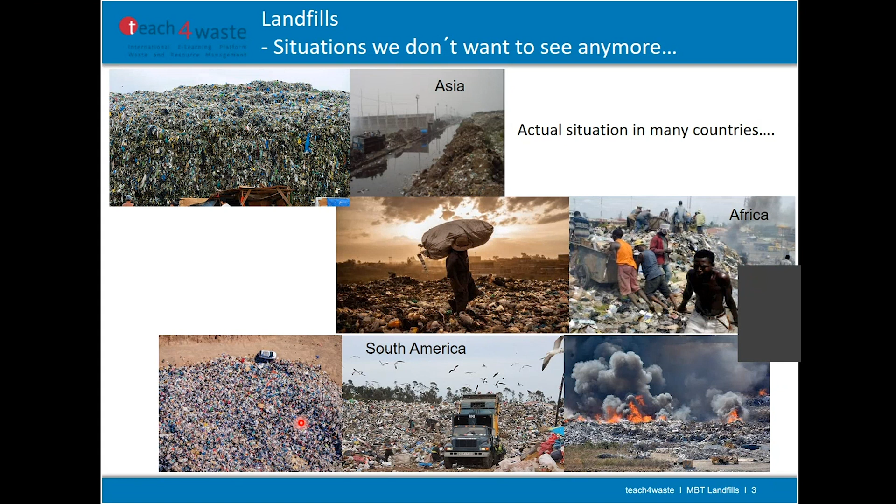So a lot of impacts are associated with waste. We have environmental impacts, we have health impacts. If you look first at the environmental impacts: air, gas emissions, the big problem of greenhouse gases. I think you have heard it also in other lectures.

Then also fire, as we have seen, problems with water. I think this is a very big problem in a lot of countries, especially if we have a scarcity of water. So if we don't have enough water, and this water is polluted by landfills, for example.

Especially groundwater supply sometimes is a problem. Then also contamination of soil, land, changes in vegetation, for example, or big areas are now landfills instead of areas where you can build up houses or make agriculture, and also contamination you have.

On the part of health impact, we have chemical entities, which means we have some toxic components in the waste. Then also during the process of disposal and operation, and on the long-term behavior of the waste inside the landfill, new products are sometimes produced and they are emitted into the environment.

Then we have also biological entities. We have sometimes, as we have seen, animals, birds on the landfills, pathogens, a big problem if it's not made in a good way. Then also an aesthetic impact.

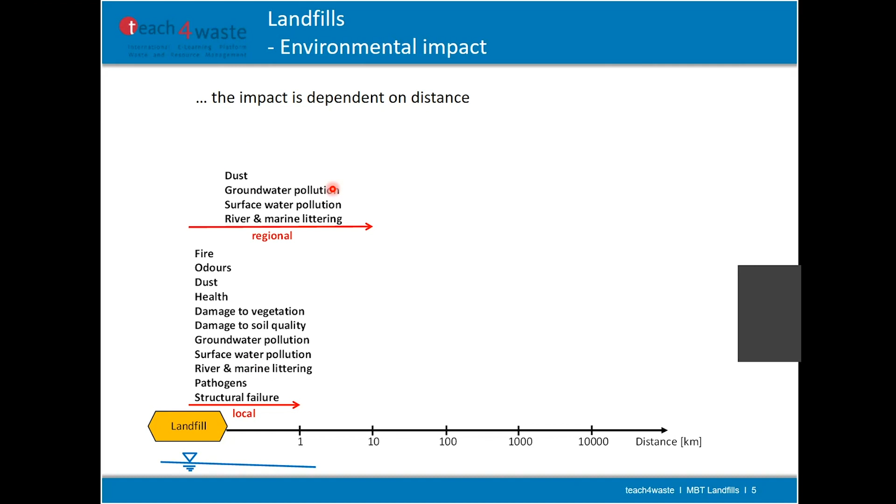On the next scale, on the regional scale, also dust. Here now also groundwater pollution, surface water pollution, and also littering of water. And the last one, the global problem we have, greenhouse gas emissions and marine littering.

So the problems are quite different. People living here nearby the landfill, they are looking more at these local problems. But if you look at the discussion we have about landfills, we are always looking at these global problems. So for the people, the local problems are more important than the global problems.

So let's have a very short look here at greenhouse gas emissions. Everybody is talking about it. I think you know this figure: in Germany, how much of the CO2 emissions are coming from waste management, and here especially from landfilling. If you look at this graph, you can see nearly 78% of the CO2 emissions coming from the waste sector is coming from landfill.

This sounds to be a very big number, but if you look at the amount, these emissions in 2020 have been nearly 9 million tons of carbon dioxide equivalents. So this is the total. But the total emissions, not only from waste, but from traffic, from construction, and so on, in Germany had been nearly 740 million tons of CO2 equivalent.

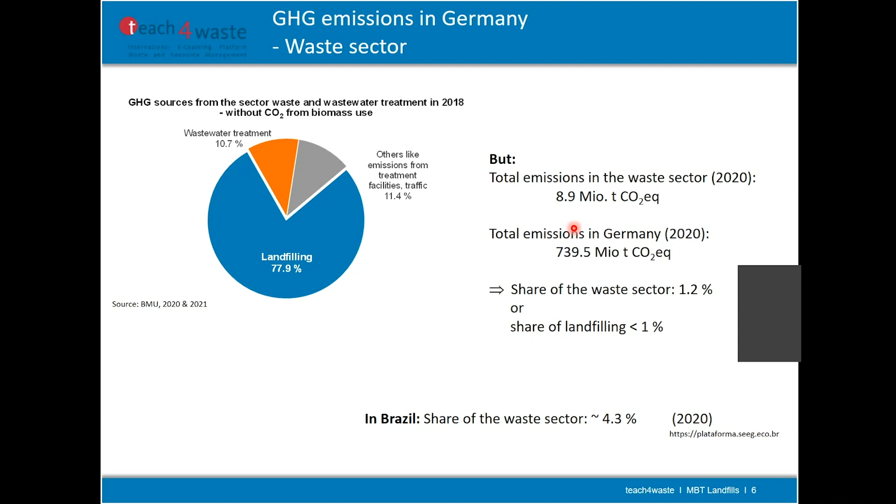What are we talking about? Everybody of us here living on this earth produces about 0.7 kilogram of waste every day, which means 2 billion tons. In Brazil it's a little bit more, about 1 kilogram. And here in Germany it's even more, about 1.7 kilogram.

So it's a lot of waste which is produced every day, and we can expect that because of population growth, worldwide growth, economic growth—so the difference between the very poor, the poor and the rich countries is diminishing—and also because of urbanization, the amount of waste in the next years will increase if we don't stop it. So from 2 billion tons, maybe we will have until 2050 about 3.4 billion tons.

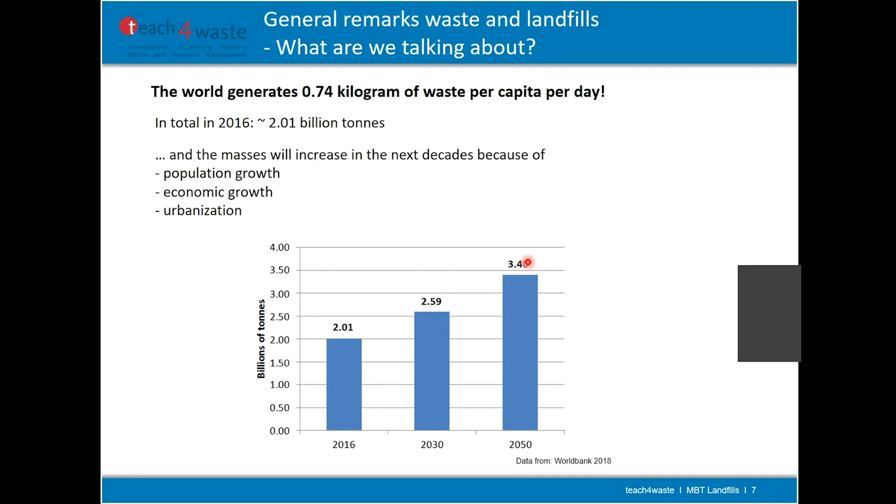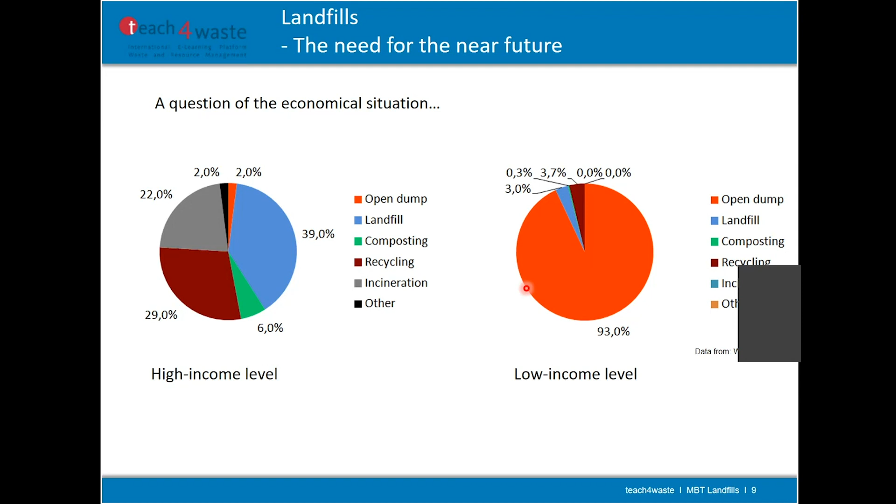So just a short look at the types of landfills for municipal solid waste which is not treated - the standard waste collected in your city and brought to the landfill. This is a sanitary landfill, which is more or less an uncontrolled bioreactor. The waste comes to the landfill and all the chemical and biological processes start, and we cannot control them - they start on their own, and we have to see what happens with leachate and gas.

Here the emplacement should be high, so we can put a lot of waste in this landfill. Then we get, in a short time, highly loaded leachate with high concentrations of different parameters, so we have to purify it before giving it back to a river or to groundwater. With this high amount of organics in the waste, we can also extract gas - we should start very early with gas collection, and this should be used for energy purposes.

We have some problems here - it's called 'dry tomb,' which means that when the operation phase, where we put new waste on the landfill, is finished, we put a cover on it and no more water comes inside. So the waste gets dry and the process stops - this is why we call it a dry tomb. We have problems with this technique, which is standard worldwide.

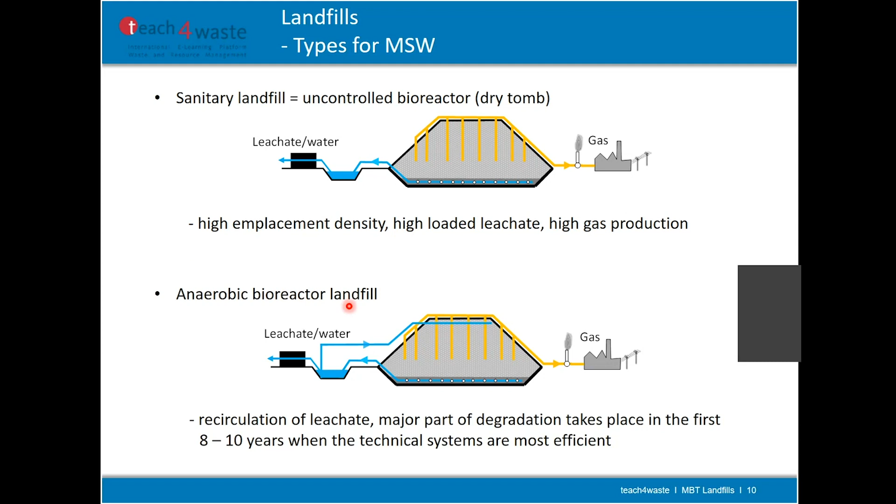So we have some new developments - this anaerobic bioreactor landfill. It was developed in Canada and the US, and the difference is that they do leachate recirculation to intensify gas production. They want to produce as much gas as possible in the first 8 to 10 years, when we know all the systems installed in our landfill are working very well. With this leachate recirculation, the supply of water to the microorganisms inside the waste is much better than in the standard case, so biodegradation may occur much faster.

Another type of landfill is the flushing bioreactor. On one hand, we produce a lot of gas by this recirculation, but in this case we add even more water to flush out components which are not degraded - maybe ammonia, and also the hard COD, the chemical oxygen demand. At a certain concentration, it's very difficult for bacteria to reduce this amount of organic substances, but you can flush out these components if you add water and also other salts.

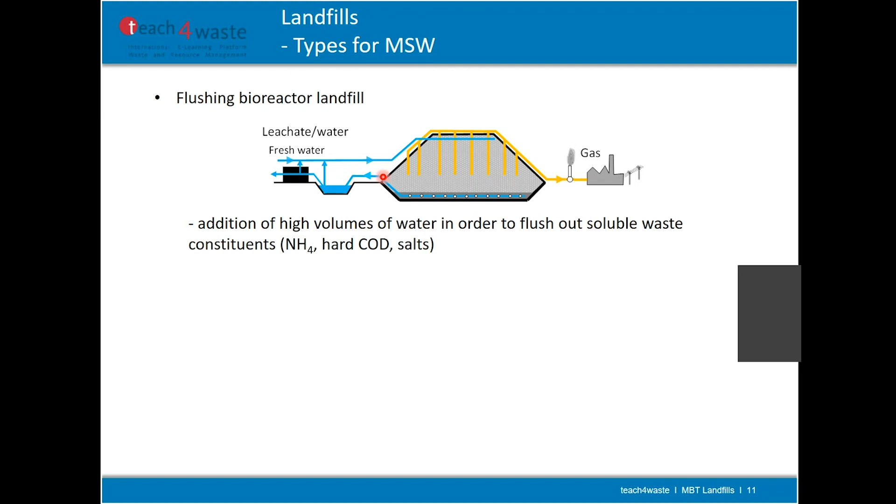Also here we have a little bit of experience - it's not very easy during the operation phase for such a landfill, which is why only a few landfills work with this technique. And another one is this semi-aerobic bioreactor landfill, which was developed in Japan more than 20 years ago.

We have also some smaller landfills in Europe, especially in Italy. Here, in the beginning, when they start to put the waste in this area, they have anaerobic conditions, the same as we have in the other landfills.

After 10 years, maybe 6 to 10 years, they stop with this extraction of gas, and they blow air inside from the bottom. So it's changing from anaerobic to aerobic conditions. In the anaerobic conditions, they get the gas and can use it. When they switch to aerobic conditions, it will stop. The advantage is that aerobic decomposition occurs much faster.

By injecting air at the base, we get aerobic conditions. The temperature inside the landfill will increase, and the remaining gas, the remaining methane but also carbon dioxide, comes to the surface where we can collect it. Also, if we inject air inside, we get out a lot of water, so this landfill will become dry over time.

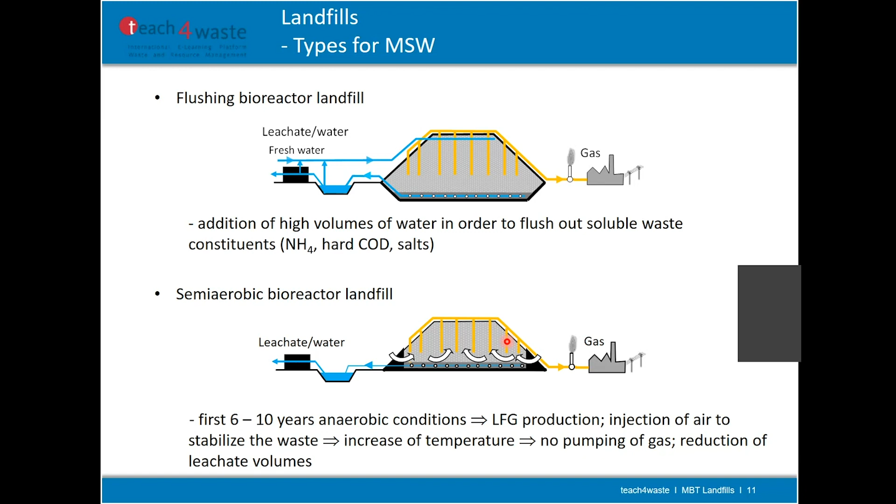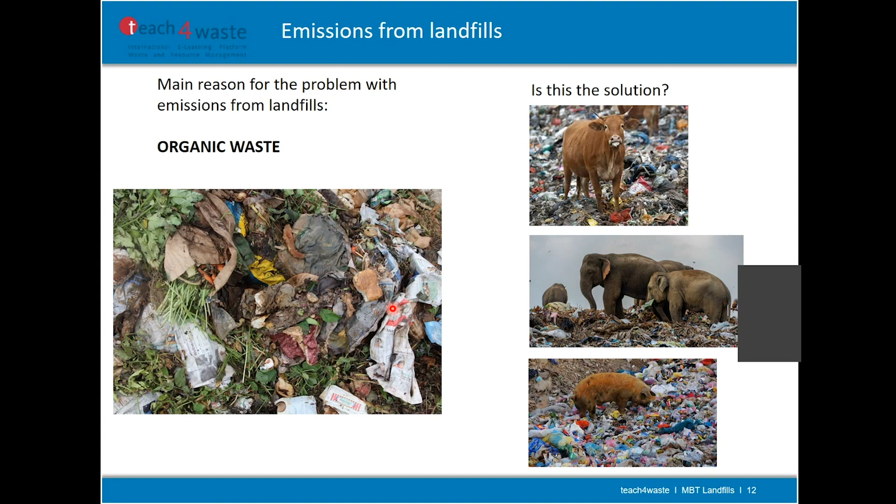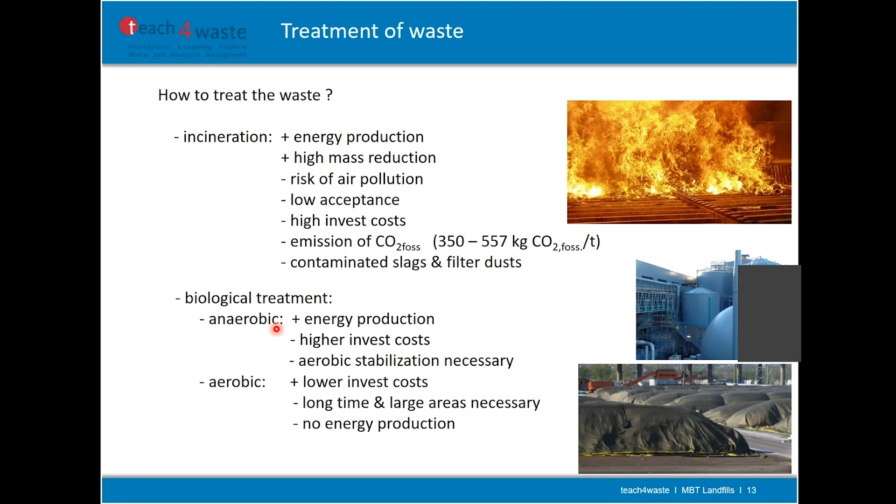But we will have a look here only at MBT. Or at first, let's have a look what is the consequence, what to do with this material. So we need, if you don't want or if you cannot use the slags for construction purposes, we need a landfill for this incineration slags.

Sometimes it's mixed with fresh waste. But if you have big amounts, then it's better to build up a mono landfill only for the slags. And you will see, if you look at the leachate at the base, you will have a lot of chloride inside, which is a problem over a very long time.

And also, you might have here some gas production inside because of chemical processes, not of biological process. And it's not methane, it's hydrogen. So maybe you get also here some problems in view of safety.

This is for the normal slags. You need also here the base liner system. Usually only soil material as a top cover system is enough, and the leachate also has to be purified.

If you have now the fly ashes from the filter, then you need a landfill for hazardous waste. So also after incineration, maybe you are still needing a landfill. And the same for output from MBT. Also here we need a landfill with a baseliner system.

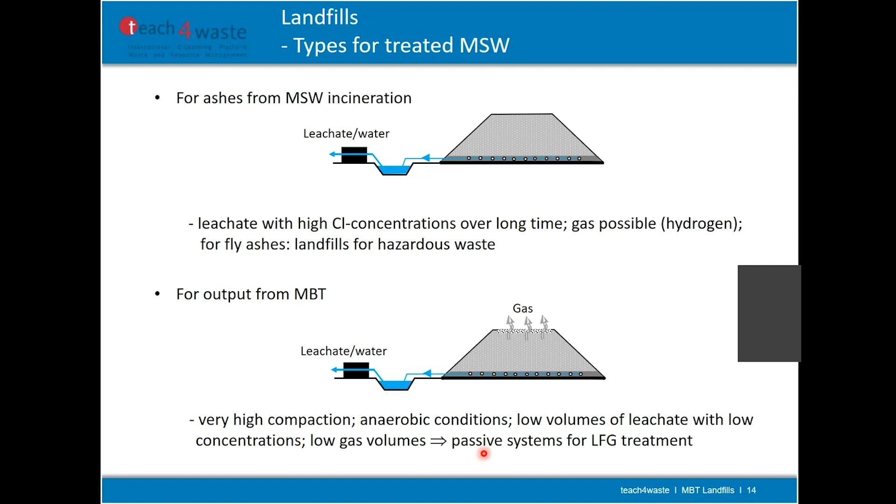Later on, so this as a kind of introduction. Let's go to the landfills. What is the difference between a landfill for fresh waste and a landfill for MBT output material?

So we will have a look at these different points, a short view at the properties, which are very important for the construction and also for the operation, but also in view of the leachate emissions and the very important point of gas emissions.

So this is what we know very well, the situation. Everything which is inside of your waste bin is going directly to the landfill. And if you have a look at the waste, what you can see, which is

Only under the aspect of looking at it, you have a lot of plastic inside. And you see there's a big difference. We have in the size, we have very large parts of waste. We have very much of these fine materials. And very often large parts is plastic, fine material is the organic. So this is what we know for a long time.

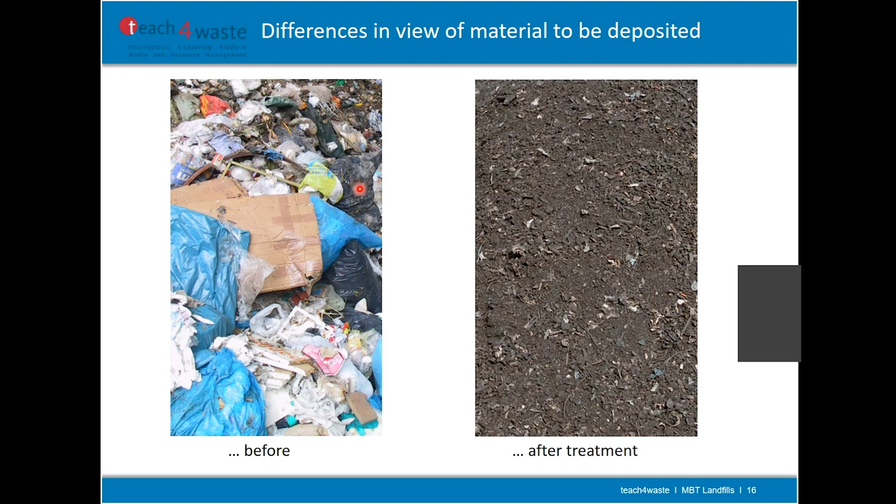And this might be a look of the waste after it has been biologically treated. So a big difference. The color has changed to this typical brown color, which shows you that the organic material is oxidized to a certain amount. And you still have here some plastic parts inside, woods, glass, and so on, but the size is much smaller.

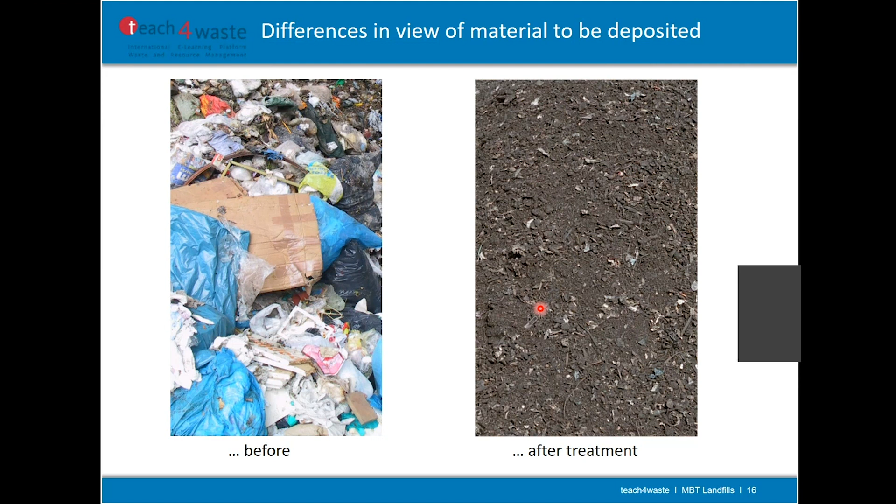In this step of treatment, not all of the organic material is degraded. There is still a certain amount remaining inside of the waste.

Some substances, such as wood, for example, are not degraded under the conditions of MBT.

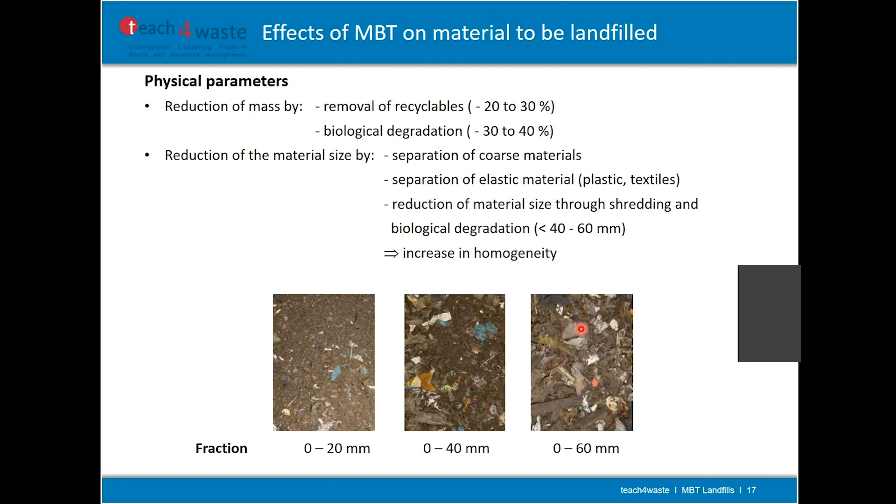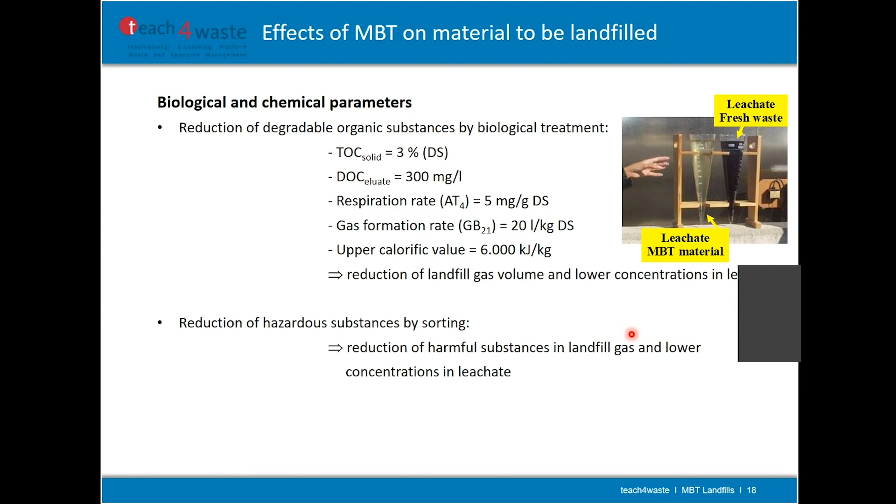And at last, we take out more or less most of the harmful substances if we can identify them. Before we put the waste into mechanical treatment, somebody looks at it to see if there are hazardous substances inside and takes them out, so that in the end we have lower concentrations of these substances in leachate or in gas.

So now we have our material and we want to place it on a landfill. If we want to build a new landfill only for this waste, there are a lot of criteria we have for standard landfills, and they are quite similar to what we need for an MBT landfill. There are no big differences. In view of site selection, you should look at the place where you want to build your landfill, not in regions with earthquakes or floodings, for example. There are a lot of criteria you have to look at.

You still need an entrance area, but now it's not the trucks collecting waste that come to your landfill, only trucks coming from the MBT plant. So the control of this waste is quite different, much easier to control. You still need a baseliner system, but you have to think about whether you can use lower requirements for building this system.

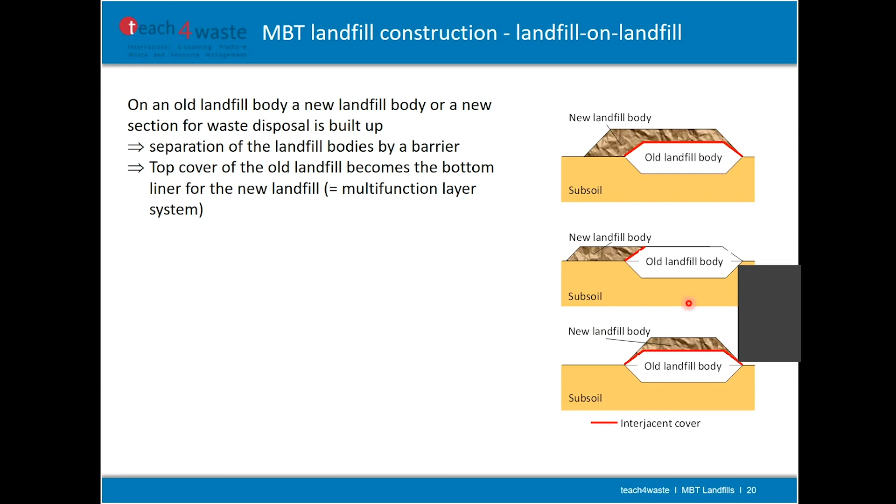It's not a problem to install such a system, but what you have to keep in mind when planning such a cover system is that the base of the new landfill body is not the natural soil - it is the old landfill body. And maybe this landfill body has not been compacted very well, so it's quite soft.

If it is quite soft in this area, you might get settlement. Problems with settlements is that we always have differences - in some parts maybe the settlement is 1 meter, and on the side it's only 50 centimeters. So these differences are always causing problems. So if you have this non-uniform settlement of the old landfill body, it is damaging your cover system. This is a big risk you always have to look at.

So let me say, if you are looking in Brazil and you have an old small dump, then I think this is not a good solution, because you can be sure that this old dump will have high settlements since the compaction has not been good. So there you must be careful - you must have a closer look to make some investigations about this old landfill.

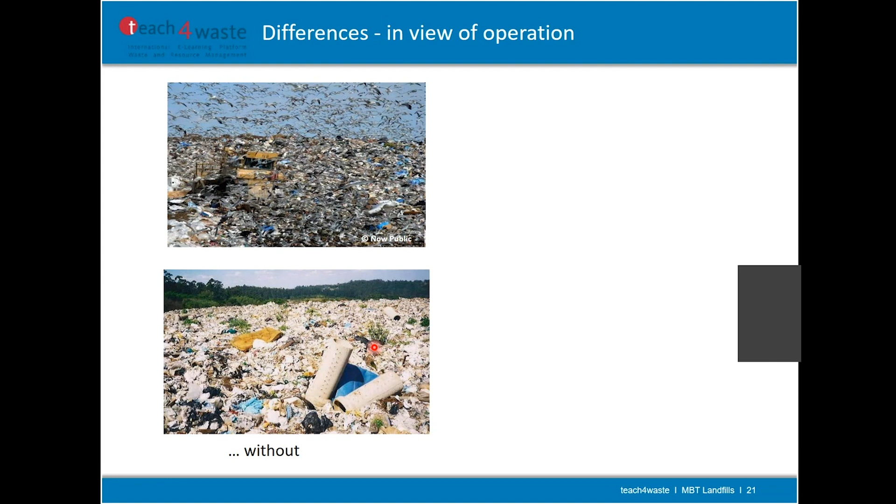So this might be the look after you have made a treatment of the waste. You don't have these birds, the material is looking more homogeneous, you can place it much better, and you get a nice surface.

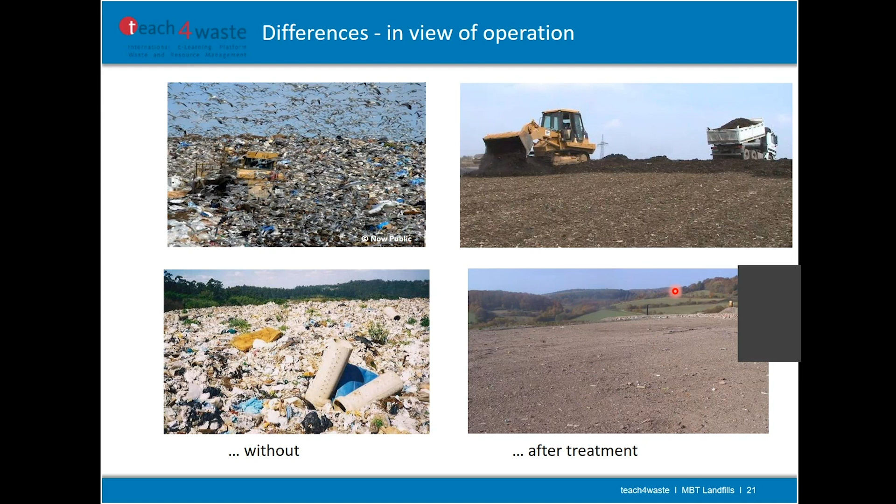So something completely different - and this is what we try to build up when we make a new MBT landfill. So from these pictures, you can also see that now the engines we need for operation might be quite different. So for both landfills, fresh waste and MBT, usually for waste distribution we use track loaders, caterpillars, or whatever.

Also for MBT waste, here you can see the waste is not coming from collection trucks from the city, it's directly from the MBT plant. Here it's an open truck because the MBT plant is nearby the landfill. If there's a longer distance between the MBT plant and the landfill, you can use a closed container system to bring the waste to the landfill.

It's not a problem. Then it's spread here in thin layers, and it's not compacted, only distributed. We know that compaction with such a caterpillar is quite poor, so it's only for distribution.

If you have a standard landfill with fresh waste, for the compaction you should use a compactor. Here you can see such a compactor. In the case of MBT, it doesn't make sense.

What is the function of the compactor? It has a very high load, and with his special wheels he is also crushing the waste. For MBT we don't need that, because the crushing has already been made at the MBT plant. So this function is not necessary.

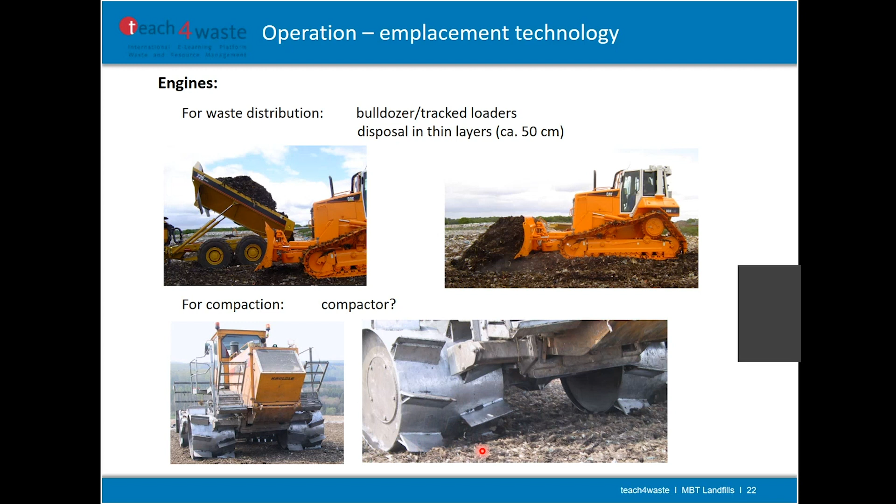What you can see, if you make tests with such an engine on MBT material, this type of wheels is not good for compaction, because when it's driving over the surface it's loosening the material again. So it's better to use another engine, for example a pad foot roller, very similar but with smaller teeth on the surface of the wheel.

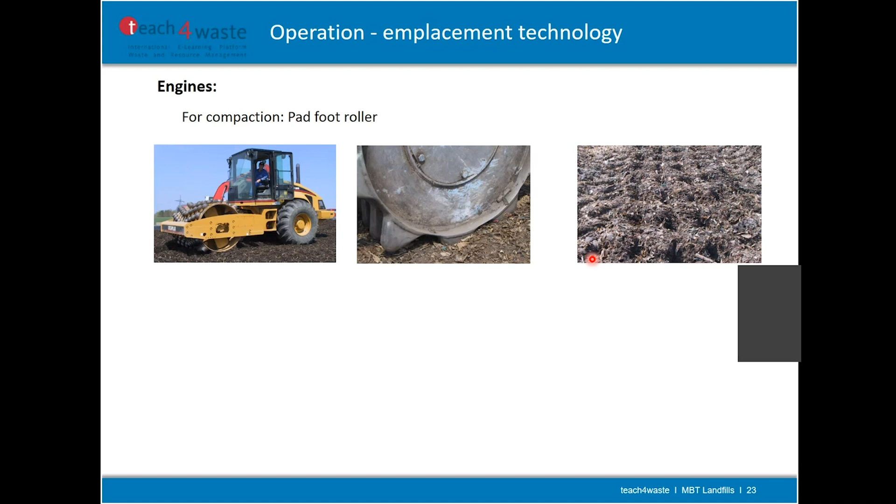What you get when it's driving over it looks very nice, but this is not what we want. You see here a lot of small holes on the surface. It's very well compacted, but when it's raining, all these little holes will be filled with water, and this we don't want.

So we need a second step for compaction, and we take a smooth roller, with vibration or sometimes without, and then we can close all these small holes by driving over it. In total, after 3 to 4 runs, you get a very nice density.

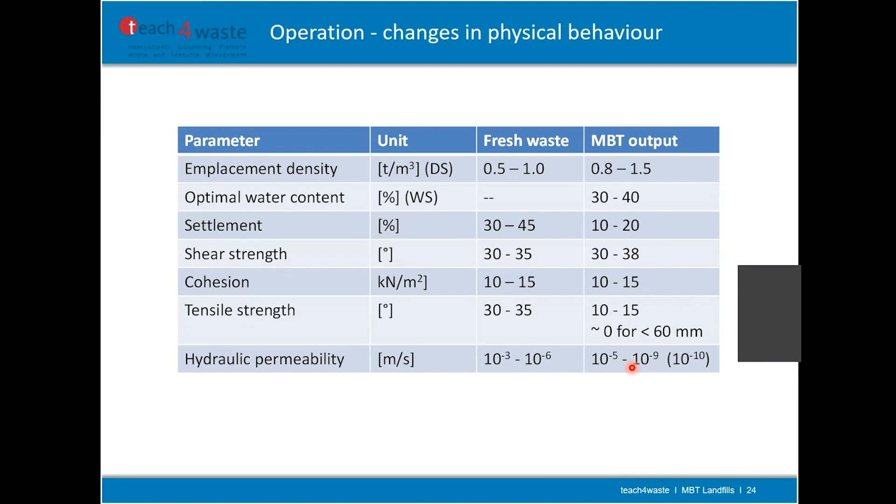The last one, in view of leachate but also in view of the gas movement, is the permeability - here the hydraulic permeability for water. You see it's quite high for fresh waste, and for MBT output it is much lower, which means that less water is flowing through our landfill.

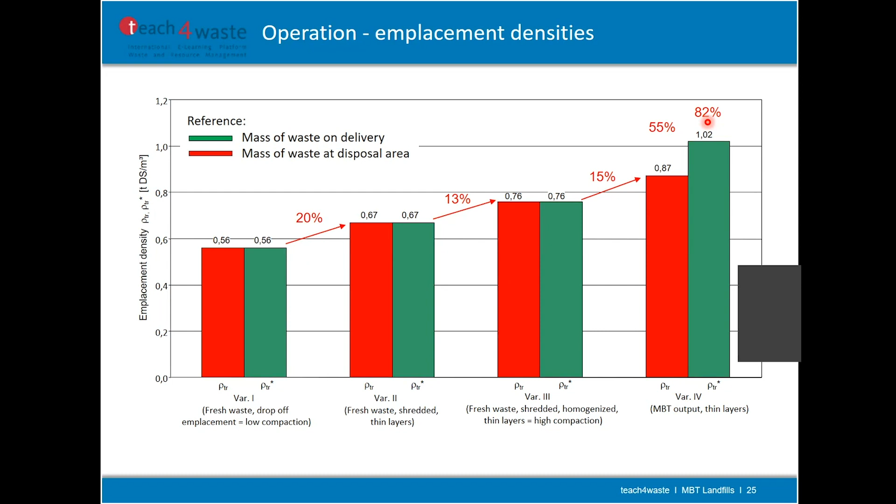The next point, in view of the emplacement density, is settlement. When we put the MBT output on the landfill and compact it, we get very fast settlement. But when it's built up slowly over several years, most of the settlement has already occurred by the time it's finished, so we don't have much settlement in the long term. This so-called secondary settlement is very low, 2.5 to 3%, because we don't have these strong biological processes. In fresh waste, we have a lot of biological processes, and therefore we have also this strong settlement.

Creep means this very slow settlement because of the huge amount of plastic, for example. But we have taken it out, so the problem is not occurring anymore. So, as we have said before, on the long term, we don't expect these large differences.

Now here you can see such a cut in a landfill. It's not looking only nice over the surface, but also here in the cut you see this material. You don't see big areas where you have a lot of pores. If you make the same cut with fresh waste, you will see a lot of holes in this wall.

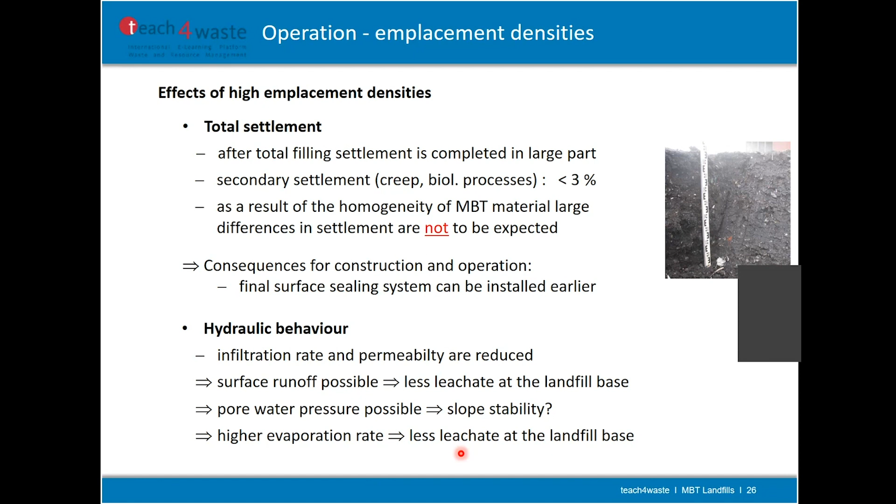This is to be expected because even in MBT, if you look at the micro scale, we have big differences—sometimes a little more plastic or a lot of fine material. This is why we have these differences.

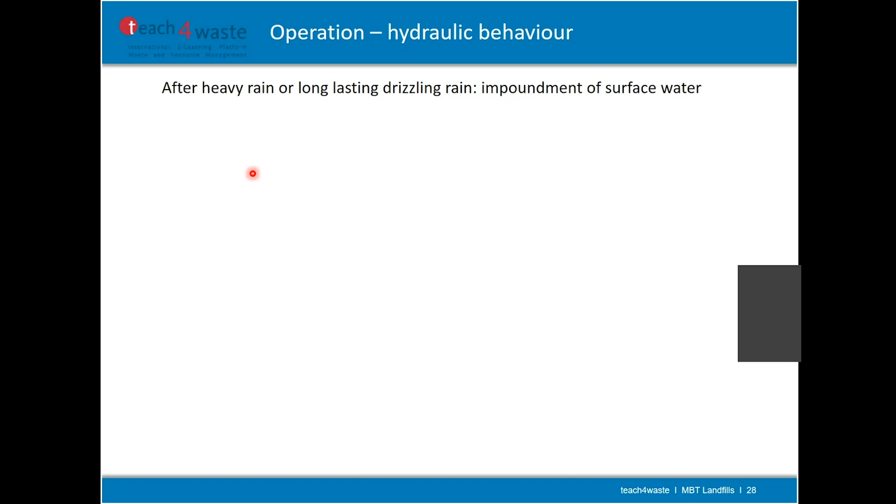So the next point is, with this low permeability, we have to be a little bit careful, especially after a heavy rainfall event, or also a long-lasting drizzling rain event. If it's very wet, then we might get some impoundment of surface water. You can see some examples.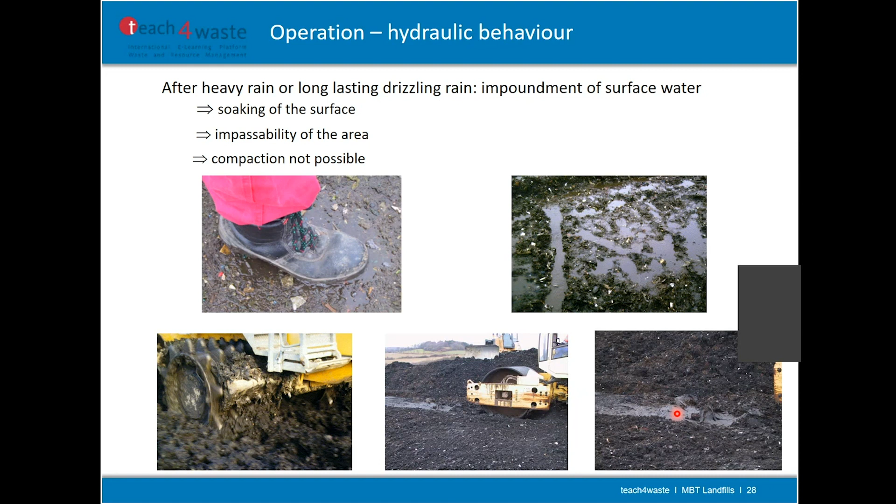So how can we avoid it? Maybe we place here a temporary cover. When we know that it will rain overnight, we place a thin foil on the surface. We put some load on it so wind cannot blow it away. Then after the rainfall event, we can take it easily away again.

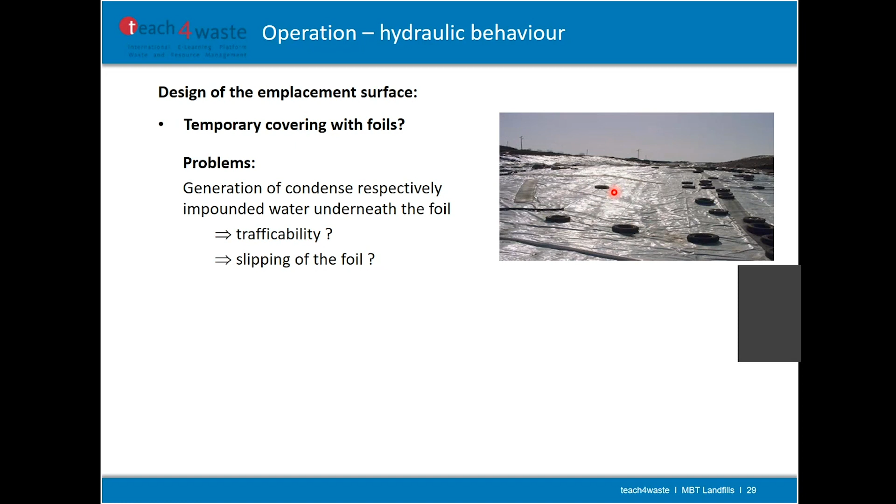But what might happen is the waste below the surface will be wet also because of condensates. The surface will be warmer on top, colder below the foil, and then we get this problem with condensation. Then we get the same problems with trafficability, and maybe then the foil is slipping. So it is a solution, but not a very good one.

It's much better to build up the surface with a certain slope. If you have this nice smooth surface, when it's raining, the water will flow because of gravity down from this area, so we don't have these impoundments. You need a certain slope, 15 to 25% should be enough, it shouldn't be too steep. So most of the water, when it's raining, especially after heavy rain, will occur as surface runoff. And as I said, avoid disposal during heavy rainfall events.

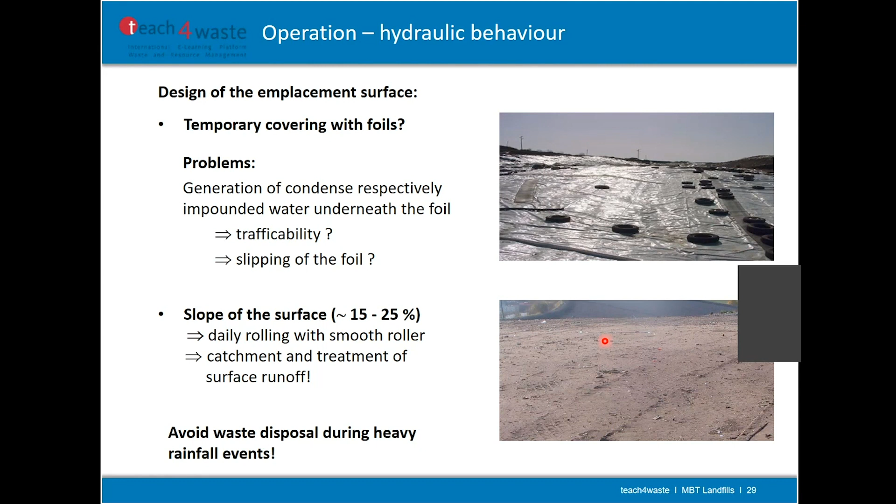So we are looking at the slope. We have seen some parameters which are influencing the stability of our landfill and therefore also the slope. Now if you look at conventional landfills, you can see the slope is very steep, you can build it up almost vertically if you want. It will stay there over a longer time and will not collapse if it is well compacted.

The reasons are the plastics, which are able to take up the tensile forces. They are acting like an anchor, holding back the slope. So the waste wants to go down, but the plastic material, which in most cases is oriented horizontally inside, is able to take up these forces, and this is why the slope will not collapse.

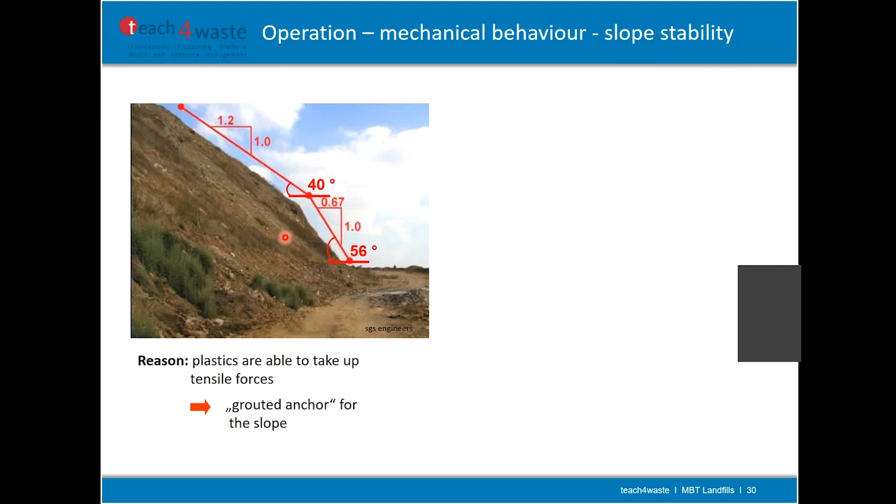In the case of MBT, it's quite different. We are not able to build up such a steep slope. You see here 50, 60 degrees for conventional waste. For MBT waste, it should be below 20 degrees, because we have taken out these fibers, this plastic material - 25 or nearly less than 5% of the mass is still plastic material.

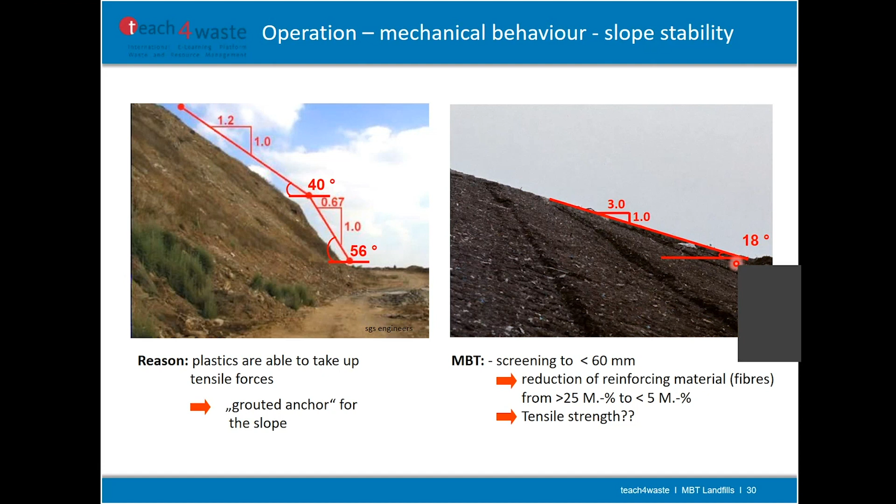So better forget tensile strengths and make a calculation as you do for soil material. This is why here the angle is much smoother. So you have to take this into account, which means also that because the slope is not as strong as with conventional waste, you can place a little bit less waste on this area. Instead of building it up steeply like conventional waste, you have to place it in this smoother way. But you have to take care about it.

So now let's have a look at the emissions. We have just seen the problems we might have when we are looking at the surface when it's raining. So an important parameter is surface runoff. The question is how much of the precipitation occurs as surface runoff and how much infiltrates into the waste.

It depends on the rain intensity. For example, a heavy rainfall event gives a lot of surface runoff. But with drizzling rain, looking at the complete day, it might be the same total amount as the heavy rain, but taking not 1 hour, but maybe 10 hours. Then the same volume of rain may infiltrate into the waste and you don't get any surface runoff.

It's also a question of compaction. Good compaction always means you get some surface runoff. Also the degree of saturation of your waste material matters. If it rained yesterday and it's raining again today, not all the water can infiltrate into the waste, and you might get surface runoff.

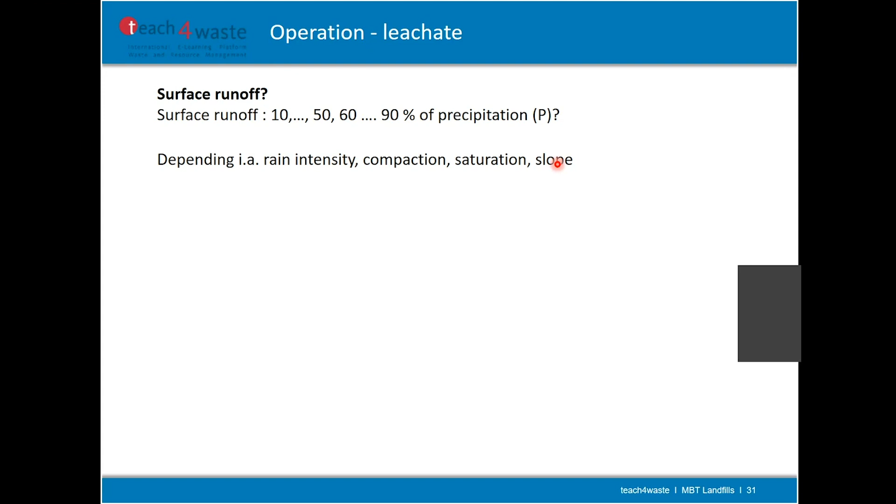And also a question of the slope. The steeper the slope, the more surface runoff you can have. If you look at fresh waste in a standard landfill, usually from such a surface you will not see a lot of surface runoff. You will get some ponding of water, water sitting on the surface, but it will not flow much to the side.

So depending on the waste and how it has been compacted, you might get 15 to 60% of precipitation reaching the base of your landfill. You see this huge range. So quite a lot of water might end up at the base.

This high amount of leachate volume occurs, for example, if you use a caterpillar for compaction, where compaction is much lower than with a compactor—then the leachate volume will be reduced. So from operation you can also influence the amount of leachate, and this leachate has to be treated.

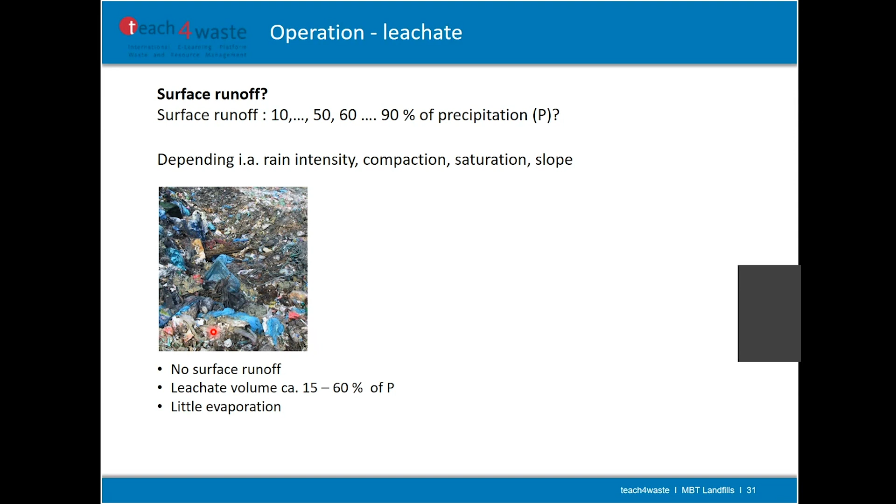Also from this surface, evaporation is quite low. Only the water on the surface of the plastic material will evaporate when the sun shines again, but from the resting material underneath it's quite low too.

So the leachate volume at the base is therefore much smaller than here. When it's very well compacted and you have a steep slope, you can expect only about 5% of the precipitation as leachate. And from this surface, evaporation will be much higher—not just 1 centimeter, but maybe several centimeters—this waste material will dry out when the sun comes out again.

And then when it's raining again, this volume can be refilled with water. It's not going into deeper parts, but stored near the surface.

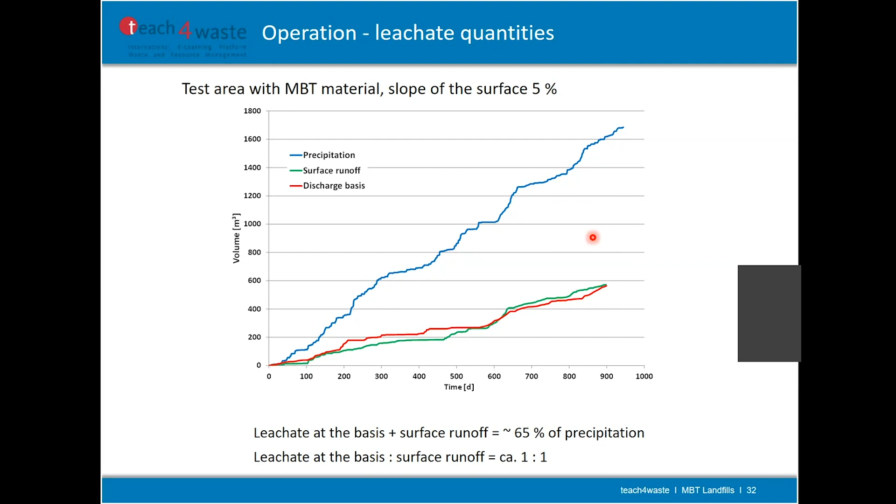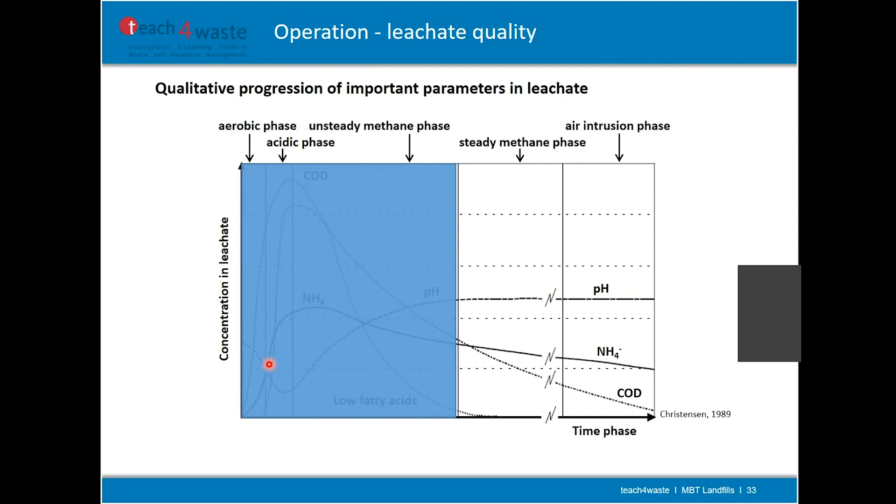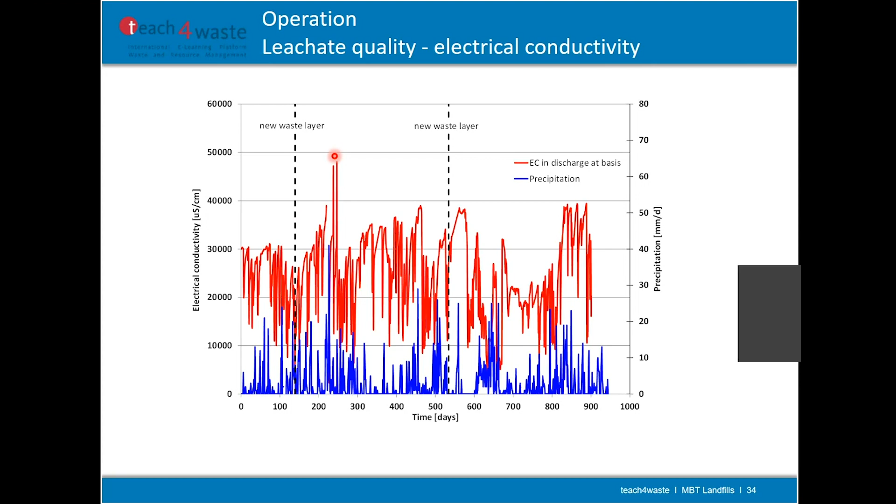So there is not always a relationship between the height of the concentration and the amount of water which is responsible for this leachate. So here we can see it's very similar to a normal landfill. But now let's have a look at COD, the organic compounds in leachate.

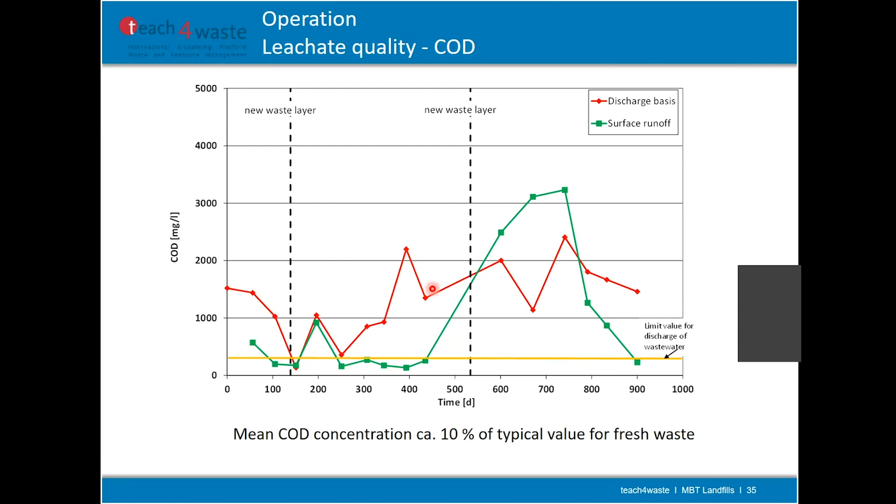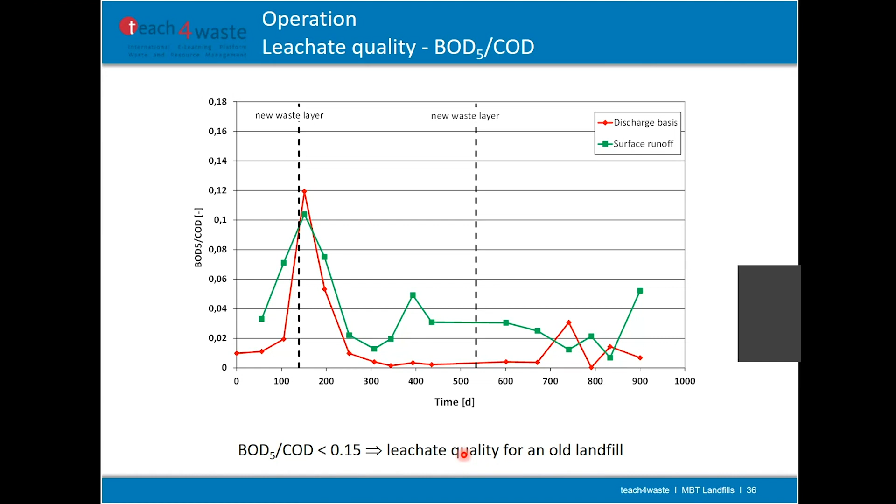This is the so-called hard COD, which takes a very long time to be degraded. If this ratio is below 0.15, this is the same quality you find in a landfill which is 20 to 30 years old. So by this MBT treatment, the degradation is working well, and the load in leachate is quite low.

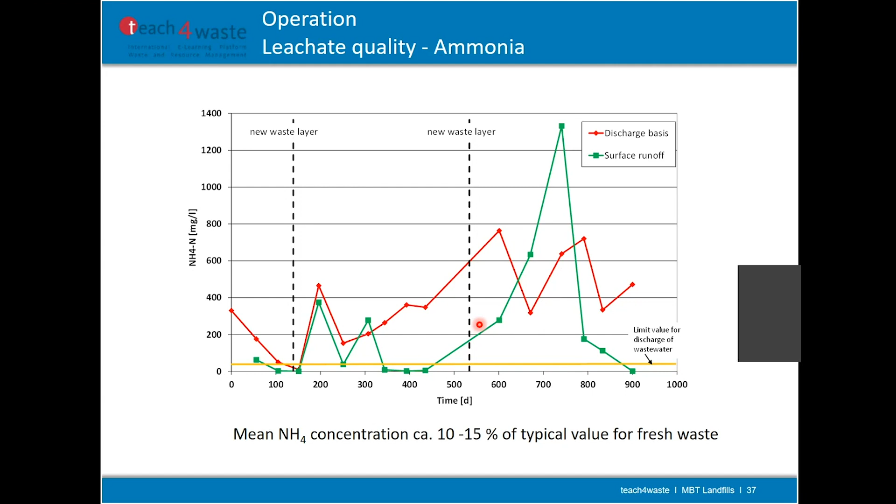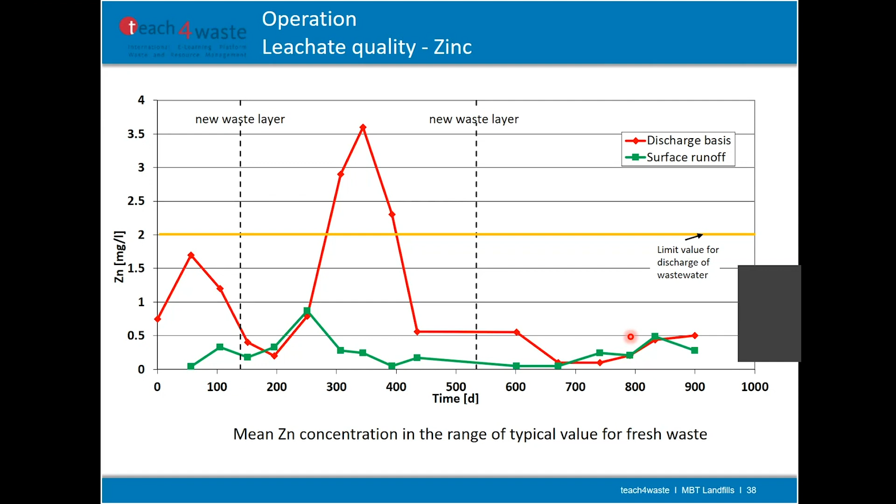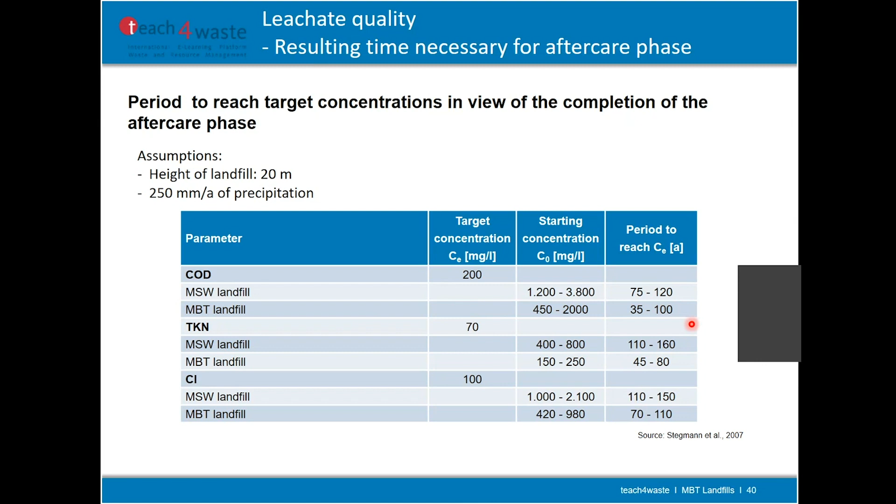Just a short summary of all this data for the leachate. We have to collect surface and runoff and leachate. We have to collect it. We have dilution effects, especially in the case of surface runoff. Treatment, we have to have a look at it, if it is necessary, always also for the surface water.

Then we can also observe that sometimes we have a short time increase after the emplacement of new waste layers. This is an effect which sometimes occurs. And the concentrations are much lower than in fresh waste, typical for landfills in the stable methane phase. The biostability is quite high, which means our MBT has worked very well in view of this organic material.

The same as we have seen for the leachate is also happening when we have MBT before. All these high amounts of gas emissions we can avoid if we do MBT. We start at this moment where we have this final cover, so where we have already only this very small concentration. This is the material which is going to the landfill, so we don't have these big amounts of landfill gas which is going into the atmosphere.

So roundabout a reduction of about 80 to 90%. Only 10% of the total volume of gas which is produced can go into the atmosphere. Depending on the type of waste, we also assume that 10 to 45 cubic meters per ton dry substance we still have as a potential in our MBT material. We can expect that this gas is flowing very slowly through our MBT landfill, because we have seen the low permeability - it's also a low permeability for the gas and not only for the liquid. And also we have very low temperatures in the MBT landfill.

Temperature has an influence because if we have a gradient, when it is warm inside of the landfill and colder outside, then we have a good transport because of this difference in temperature. But in fresh waste we have temperatures of 50, 60 degrees, while in an MBT landfill we maybe have 20, 30 degrees, but not more. So we don't have this driver of transport because of the temperature gradient.

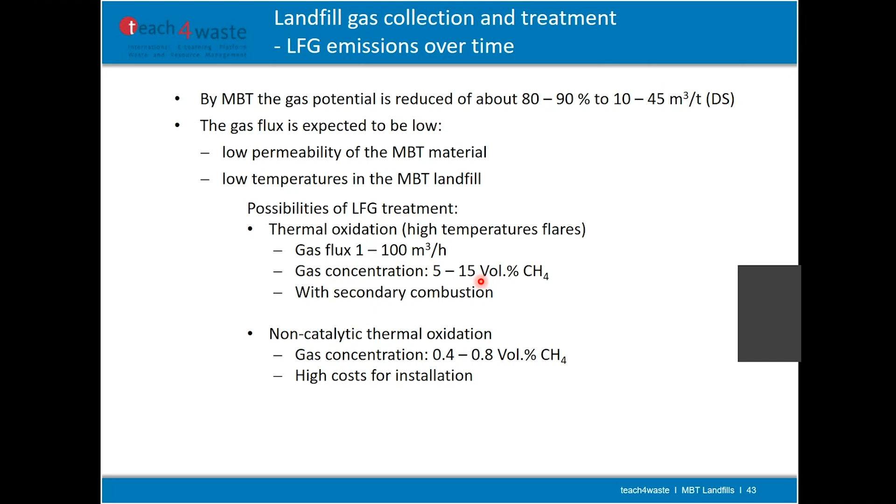So these are the active treatment possibilities we have. There are a lot of developments at the moment in this area to get more techniques, or we use a completely different system. This is a passive system, which means we don't need any gas shafts or horizontal drainage systems. We can use the waste as it is on the landfill - it is a passive system. We don't have to suck out the gas from the waste material, and we do it with a so-called methane oxidation layer. So this is what we'll have a closer look at in the next minutes.

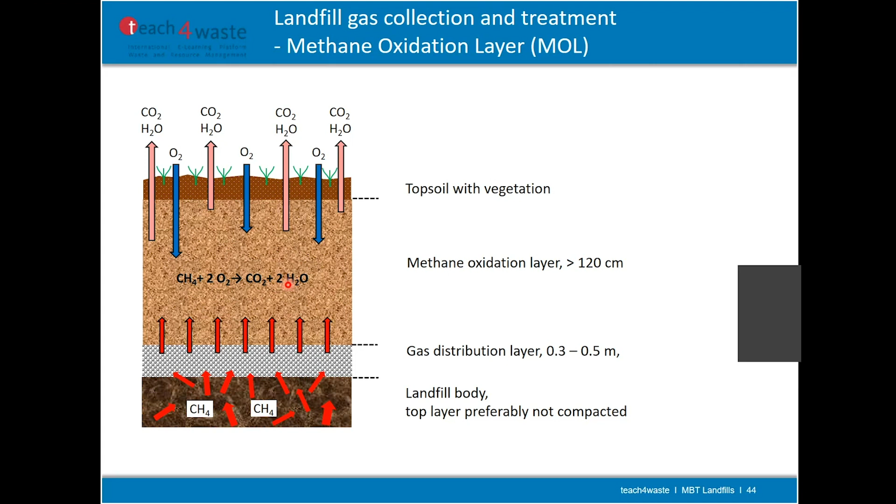So here we have some bacteria inside. They need methane, they need oxygen, and then they can reduce it to CO2 and water and energy. So you need both. Only in this area are there also these methanotrophic bacteria - they only can live in this area. And this is then the reaction which is occurring in these small bacteria.

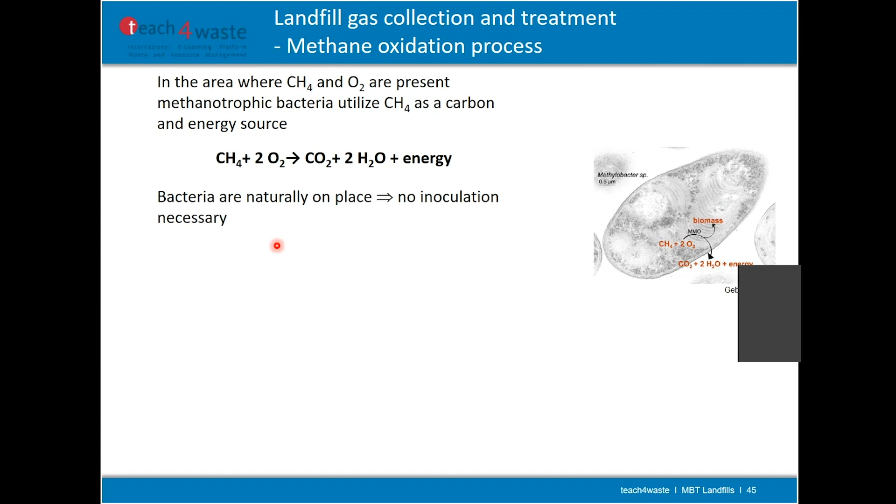And also important, they are already in place. You don't have to make an inoculation, you don't have to add them. They are in the soil or whatever material you use.

So this reaction is quite simple, but there are some points you have to look at. On one hand is the methane load. If too much methane is coming into this layer, then it will not work - it is too much for the bacteria. This reaction cannot occur for all the methane which is flowing through the methane oxidation layer.

Then also important - not only the load, the height of the load, but also the spatial evenness, which means if we have big differences in the concentration distribution inside the layer, we also get problems where in some parts it's too high, in other parts it's quite low. And also very important is that we have enough oxygen coming from outside into our system.

And then we also have to look at the conditions so that the microbes feel well. So we need a certain temperature - if it is cold, then we always get a problem, they are not as active. Humidity - they need a certain amount of water so they can act very well.

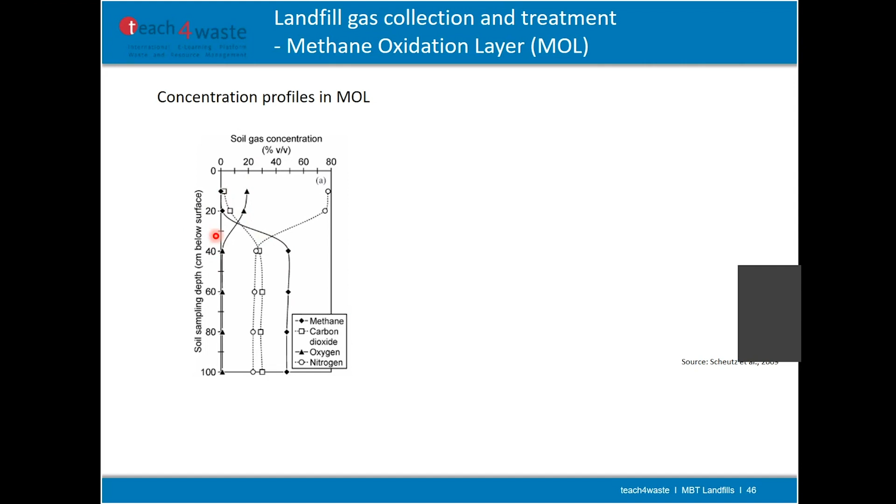So we have here a certain layer with optimal conditions between the amount of methane and oxygen. Still in this profile of the soil, we see the reduction of methane and oxygen, and this area where we have a high oxidation rate. It starts slowly from the bottom, then we have an optimum, and by the top the concentration of methane is already low, so the oxidation rate is also decreasing.

So mostly in the upper 60 centimeters. Also, the layer should be 1 meter to 1 meter 20 high, to be sure we have enough space for the oxidation. It depends on the soil type how large this layer is where the oxidation occurs.

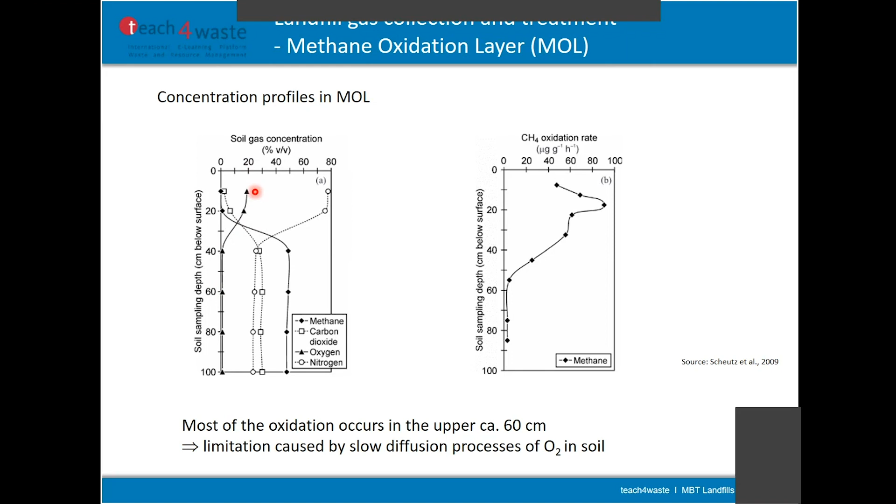One of the limiting factors is that for the oxygen, it's difficult to get into deeper layers. Oxygen is only transported by diffusion, and diffusion is a slow process.

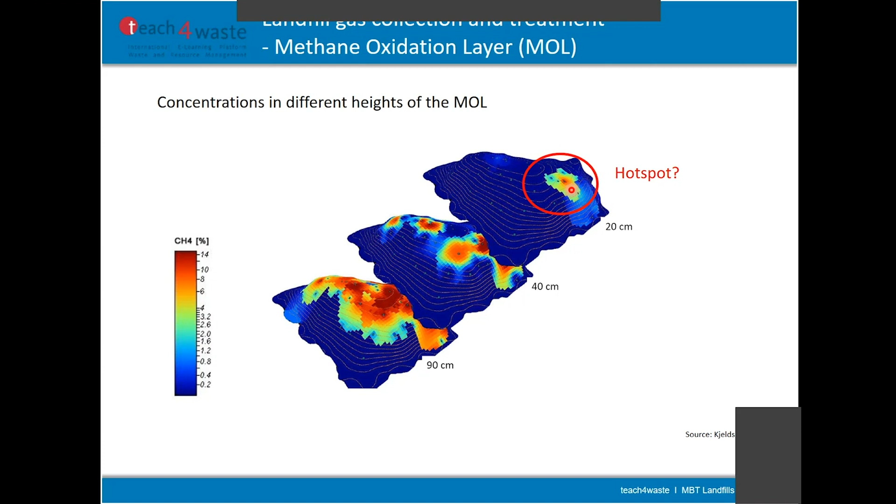We will have a look later on. A problem which might occur is that some methane is coming to the surface, so there are some problems with the methane oxidation.

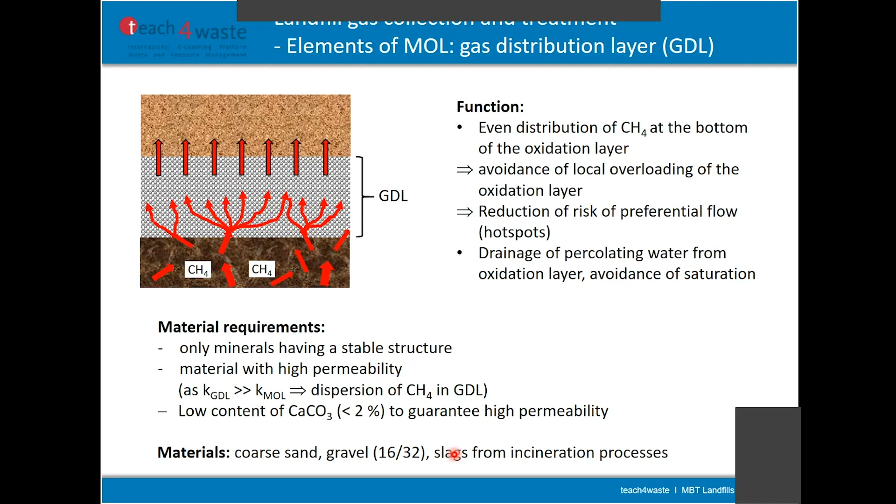Also, not too much calcium carbonate, to keep high permeability so no reactions occur in this GDL. In most cases, this is why we use coarse sand or gravel, 16 to 32 millimeters. These are typical values also for standard landfills for drainage material. Or you can also use larger slags from incineration processes.

The next element is the methane oxidation layer itself. In many cases, it's a natural soil. Its function is to provide a nice flux of oxygen from outside into this layer material, and we need certain boundary conditions for the bacteria long term, so they feel well and stay very active.

In many cases, we have two layers on top: a humus-containing layer, a natural soil material with vegetation, also made to avoid erosion processes when it is raining. Then we have the layer where the methane oxidation occurs, and in this area not too much organic material should be inside the soil material.

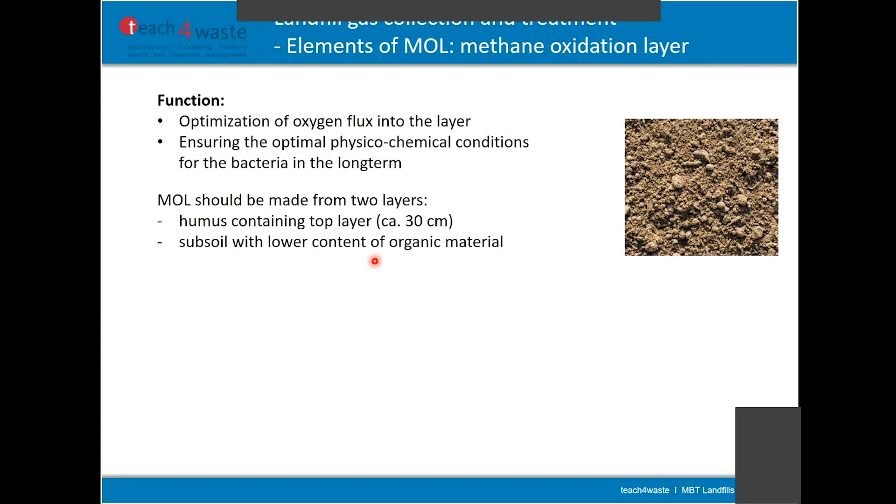We have seen that O2 from the atmosphere moves in only because of diffusion, due to the concentration gradient: 20% outside in the atmosphere, near 0% inside the soil at a certain depth. This is why gas is transported from outside into the soil. But this diffusion also depends on porosity, the most important parameter. We need some space where the gas can be transported.

So we need a coarse material. If we have low amounts of silt, that's very nice. If we have clay, for example, then we have big problems. Sand material, washed sand for example, is very nice to use here. We also have to take care regarding compaction. If we are driving with heavy engines over this area, the soil is compacted and the porosity is reduced, making it more difficult for oxygen to be transported into the soil material.

Also water content matters. When we have a rainfall event, for a short time the pores are mostly filled with water because it is raining, but this water slowly flows downwards due to gravity. After a while, we again have open pore space with a certain amount of water, but also enough space for the gas.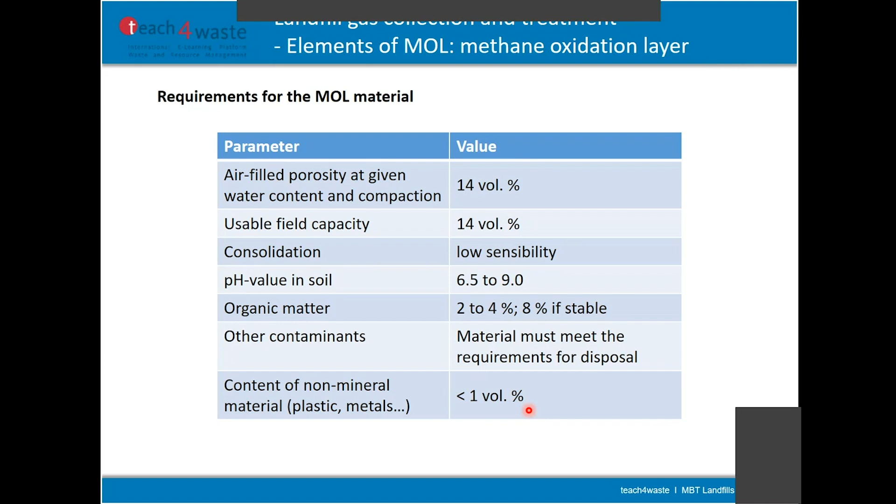So what is possible? Here are some results from practice.

From different investigations, they looked at the emission reduction with a certain emission rate. They determined how much gas is coming to the surface, and then saw how much is reduced if this gas is going through the methane oxidation layer.

What you can see is, when we have a methane oxidation layer with a certain quality, and we need this distribution layer, we have very high emission reductions of more than 90%, nearly 100%. If we have this fine material for gas distribution, it's much reduced.

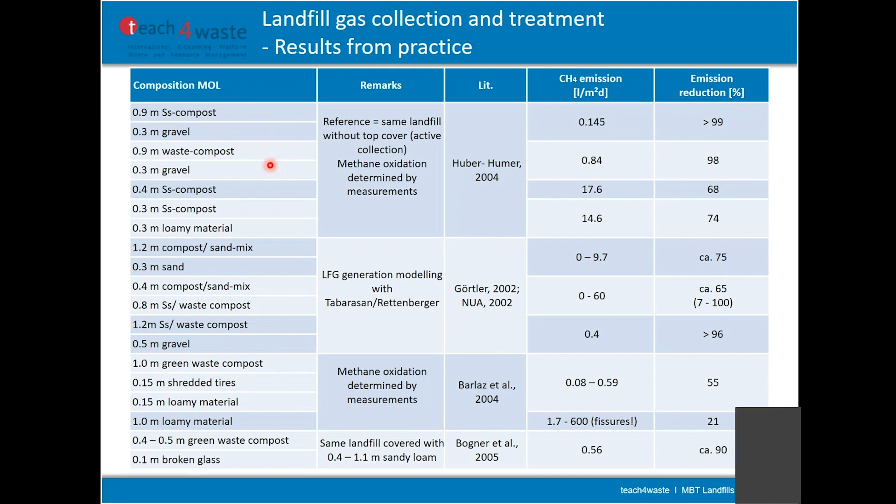If it is a larger landfill with much more gas, then we need not only one window, we can place several windows. So we have small emissions, which are above the allowed limits. Then the gas goes by itself into the gas distribution layer, and here the methane oxidation occurs. This technique is used quite often if we have an old dump which is already covered, and we want to extract the remaining gas.

Or we can use something very similar: now we replace the cover completely with this bio cover, our methane oxidation layer. Also here we have the gas distribution layer. The amount of gas is low, and the concentrations are low, so that active degassing doesn't work anymore, but the emissions are still too high and not allowed.

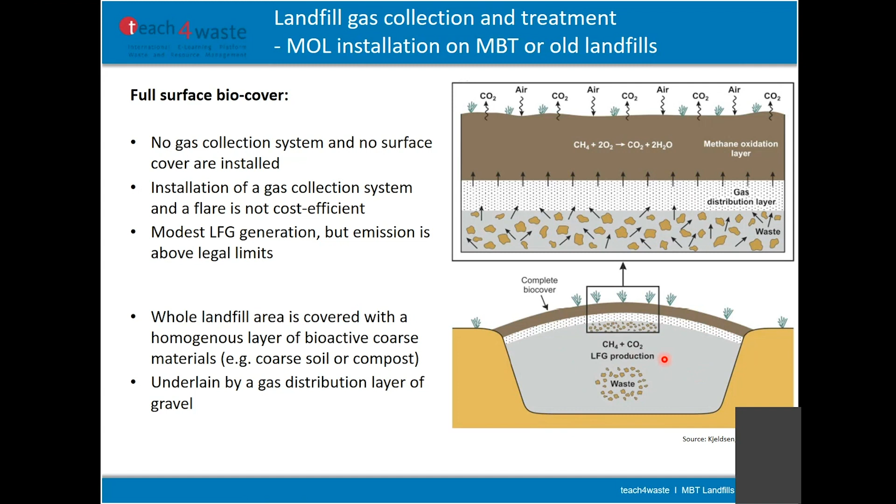The last option is the biofilter. You can use it if you have a gas collection system in your old dump, some pipes, some drainage, and you connect this to a biofilter. A small part of the cover is opened, and such a biofilter system is installed and connected to the gas pipes or drainage pipes. Gas is flowing inside.

Usually we have a lot of water vapor in the gas, so we have to collect this water, which condensates at the base, and then the gas flows through this part. This is working also quite well; we have good experiences here.

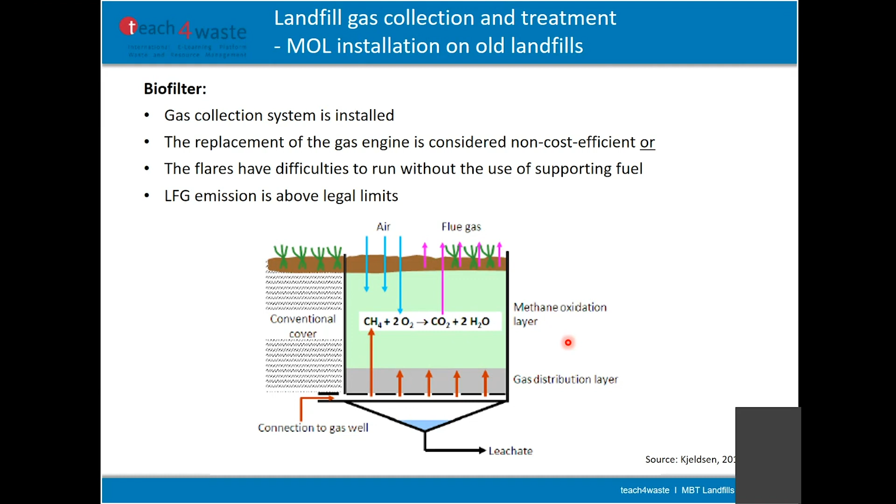But what might happen, and this nearly always happens, is that we get some hotspots. So you have to monitor the system every year, make some measurements on the surface, and what you might see after a while are these hotspots. This is a quite small area, 1 by 1 meter, and you see a lot of measurements have been made in this area, with very small areas showing very, very high concentration of methane.

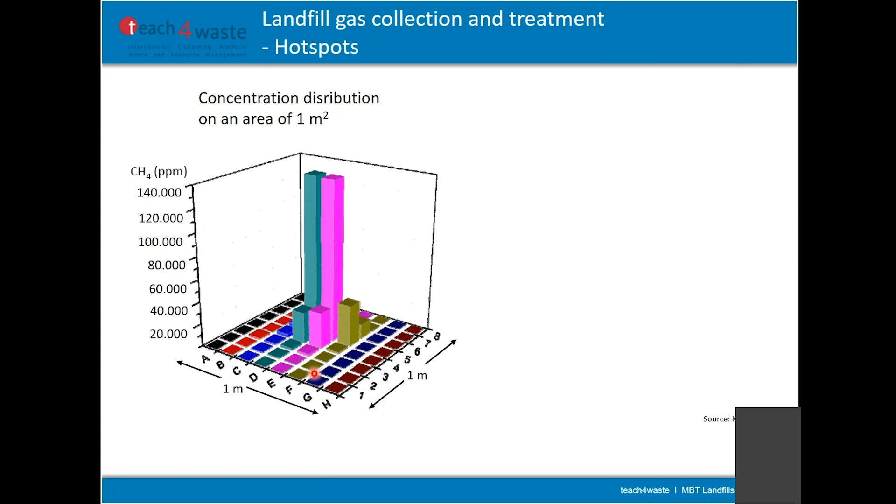If you look at these profiles, this is on the side nearby the hotspot. Here you can see this high concentration of methane, which is reduced, and also the oxygen, which is reduced also. At the hotspots it looks quite different. Here we have from the bottom to the top nearly the same concentration of methane and also carbon dioxide, in high concentration. So in this area, it is not working. This is why you have to make monitoring. And if you see such a hotspot, you have to open your system to replace the soil material, and then you can hope that it will work better in future.

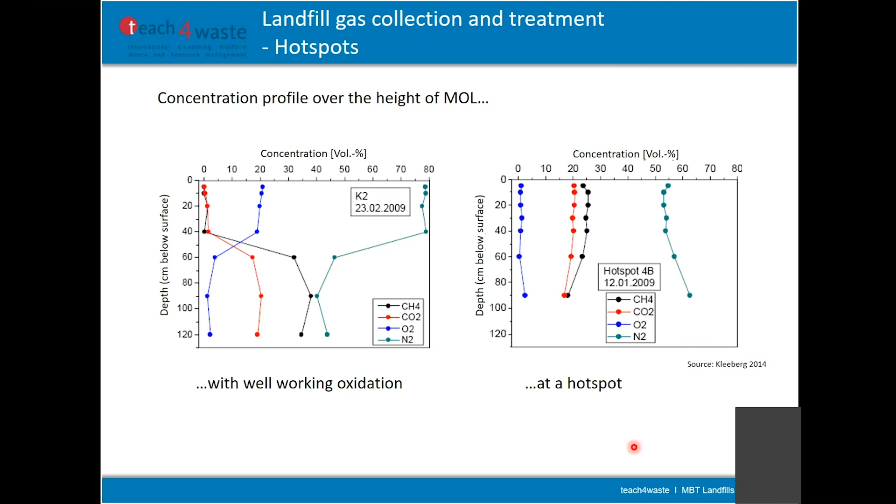So the performance of methane oxidation is very good, as you can see. Here is the emission potential: if you have fresh waste, round about 200 liters per ton, depending on composition, but a mean value of 200 liters per ton. By MBT, we are reducing this big amount to about 40 liters per ton. And if we place this material below such a methane oxidation layer and make a measurement on the top, then maybe we get 4 liters per ton of remaining gas potential. So this is very, very low, and it might be reduced even further, depending also on the methane oxidation layer. So you see the big difference between fresh waste and using MBT plus such a methane oxidation layer. We can do a lot in view of greenhouse gas emissions with this not very cost-intensive and complicated technique.

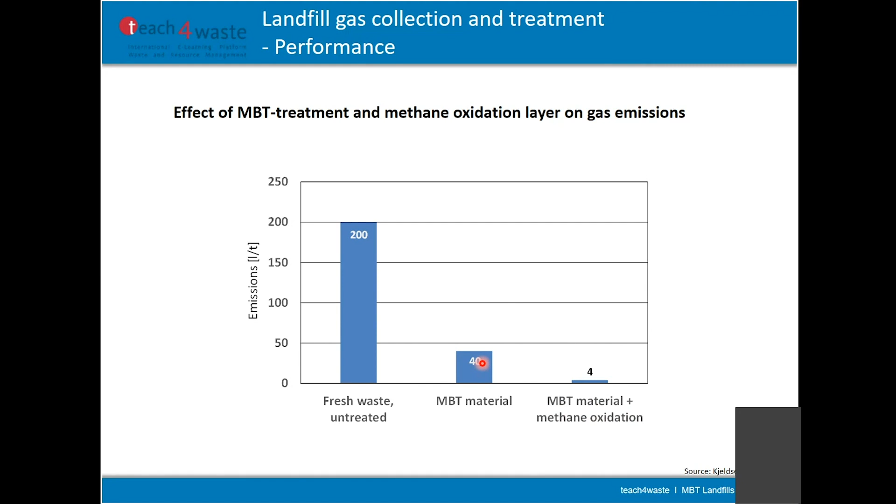So let's have a look at the long-term performance. Maybe it's just working for 1 year and afterwards there are some problems, but in the meantime, especially in Denmark, they started very early with these methane oxidation layers. They have a lot of experience also over longer time. So you have to monitor it. As I said, you have to make, every year at least one time, surface measurement with FID, this detector. With this detector, you can only see if there is methane or not and the concentration, but you cannot determine the flux, only the amount of methane in the air.

On the surface, you should also have a look in the methane oxidation layer itself, to check temperature and maybe also take some samples to analyze the gas concentration. From these data, from these profiles, you can determine where the methane degradation area is. Maybe after a while this area of methane oxidation gets smaller and smaller and moves nearby the top of your layer. Then it shows you that you have a problem with the diffusion of oxygen into the methane oxidation layer, so then you might change your material.

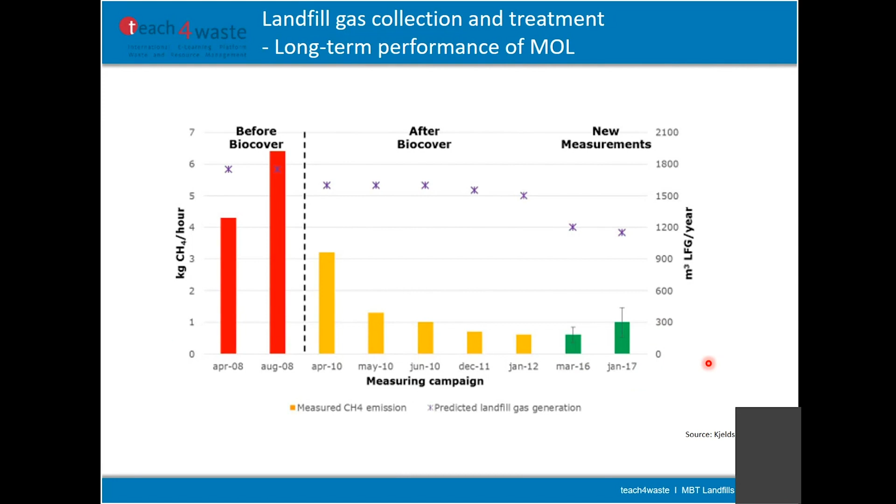This has been the summary of the investigators: still low emissions, and they show the profiles they've determined that they still have oxidation in the methane oxidation layer. Oxygen is still diffusing inside this layer. They have elevated temperatures, showing that it is working well. They also tested the soil materials placed in the biofilter, showing that compared to the values at the beginning, it is working quite well.

They still have problems with hotspots. This is a problem which will always occur, where at a certain place more gas comes out. It will change, not always at the same place, it might shift over this large area. So in total, the biocover is still working.

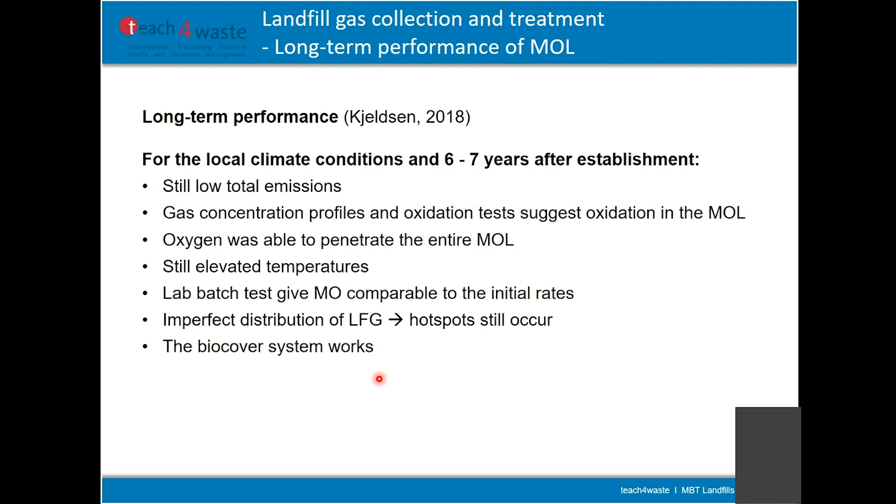So in the last 2 hours I've told you a lot. Let me just make a short summary. If you want to use MBT...

You must always think of what to do with the material remaining after MBT. This material has to be analyzed to a certain amount, because every technique has an influence on the quality and behavior of the material going to landfill. So it's not possible, if you have a landfill and an MBT nearby and want to build your own system, to just say you can take the values from the other landfill or MBT. It will not work. You have to make some investigations in the beginning.

Then we have some changes. We have other engines, as we've seen. We need less infrastructure, for example no landfill gas collection system. We have a longer lifespan of the landfill, so we can place waste on it for a longer time. We need less staff for operation, and importantly, we don't have any more birds, rats, and other animals on the landfill.

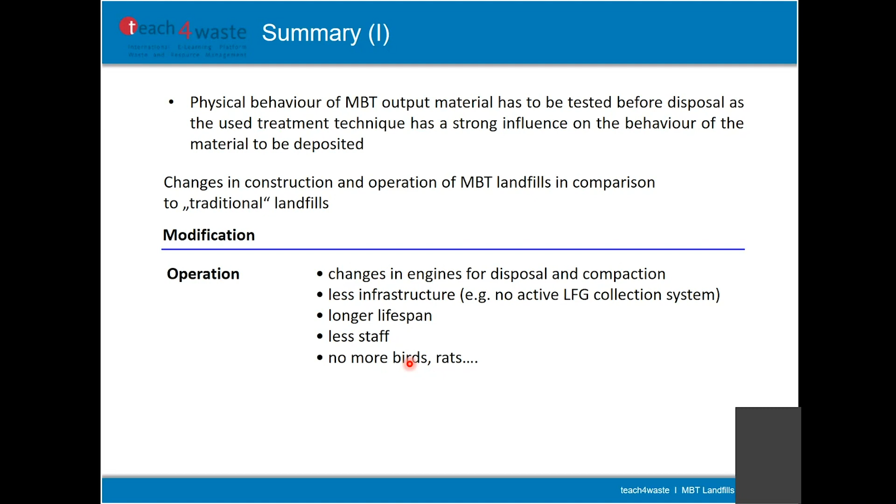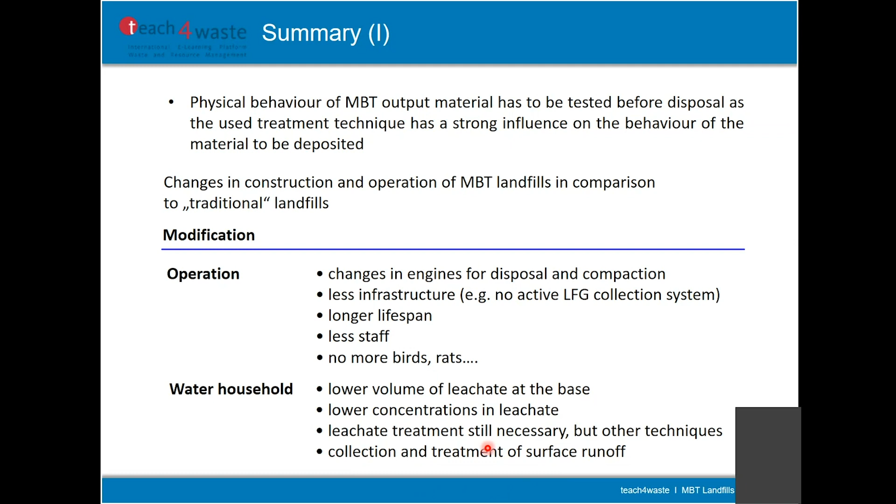In view of the water household, we have lower volume at the base and lower concentration in the leachate. We still need to treat this leachate long term, but with other techniques than we use for fresh waste. We also have to collect and control surface runoff, and maybe in the beginning treat this surface runoff too.

In view of stability, we have higher density of the material and low settlement compared to fresh waste, but we have flatter slopes to take care of, and a higher risk of pore water pressure, which might occur inside the landfill and reduce its stability.

In view of gas, we have low volumes and concentration of methane in landfill gas. We still have to treat this low emission rate, these low fluxes, but we can use a very simple passive system with low investment costs and low operating costs.

And lastly, in view of aftercare, aftercare will still be necessary. It's difficult to say if it's really shorter than with a normal landfill, but the monitoring effort is much lower, because we don't have these high emissions in leachate and gas, and we don't have high settlements that might require changes to the top cover system long term. So it's much easier to handle, meaning the costs of aftercare will also be lower.

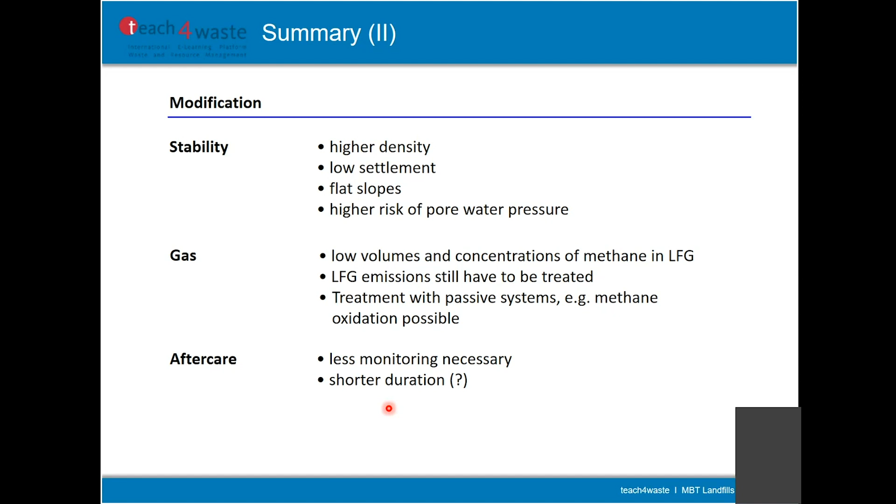So in total, MBT is a good chance to use landfills on the long term, but keep in mind MBT will not work for megacities with 5,000 to 6,000 tons of waste to be treated every day. But for smaller communities, I think it's a very good alternative to incineration.